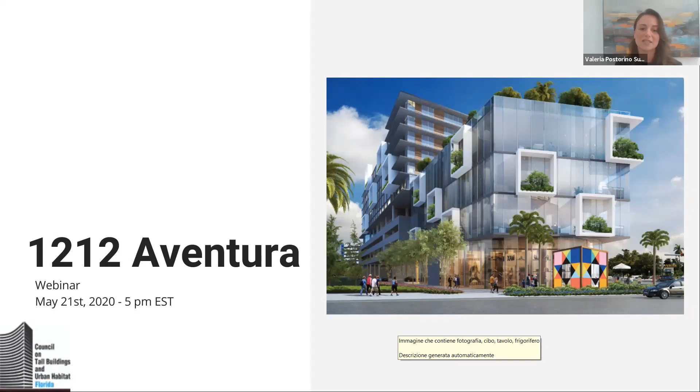Just a brief introduction about the Council on Tall Buildings and Urban Habitat. It was founded in 1969. It's a non-profit, multidisciplinary association focused on tall buildings and sustainable cities. As of this year, 2020, the CTBUH member network includes more than 2 million individuals working from more than 10,000 offices spread across the world. In our audience are developers, engineering, architectural firms, contractors, construction managers, project managers, materials and systems suppliers, associations, governmental associations, universities, and others.

Here's some of our members. The CTBUH has a global presence with 3 offices between Chicago, Shanghai, and Venice, Italy. We have 13 chapters, of which the Florida chapter is an active one. It is led by Christoph and Danilo, together with Dean, Marco, and Mindy. And this year we started the Future Leaders group, which I am chairing together with Santiago, Hari, Elizabeth, Sergio, and Jorge.

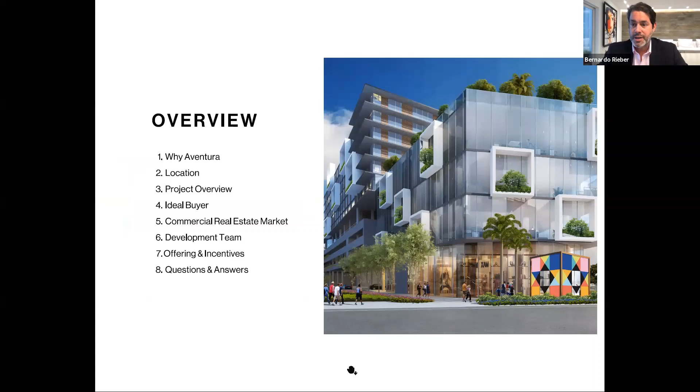I want to introduce myself as a civil engineer and general contractor, but I have shifted to the development side. I mention this because I understand there are a lot of colleagues in the audience, and my role here is to try to put together the best team of experts possible to develop these beautiful projects that will really leave a mark in the community.

Now the first question is, why Aventura? I presume that we have in the audience people from all over the world. For those that know South Florida, I need to mention that we're blessed. This city has great weather, a fantastic mix of cultures. Well, in the panel, everybody's from a different country, so that gives you an idea, and we all live here.

And Aventura in particular has a very affluent community. And within the city, we are located in an area called Aventura Health District. We are 1 block away from the major hospital. We are less than a mile away from a major mall, the Aventura Mall. It's visited by 28 million people a year. So that's incredible.

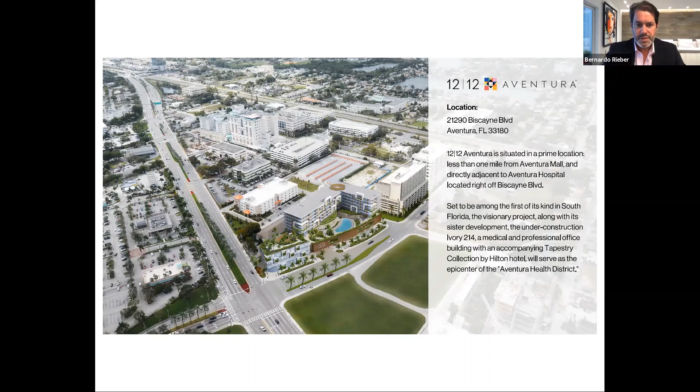As I said, me as the developer, have the role of putting together a great team, which will talk to you in a minute, in architectural, structural, sales, to make this happen.

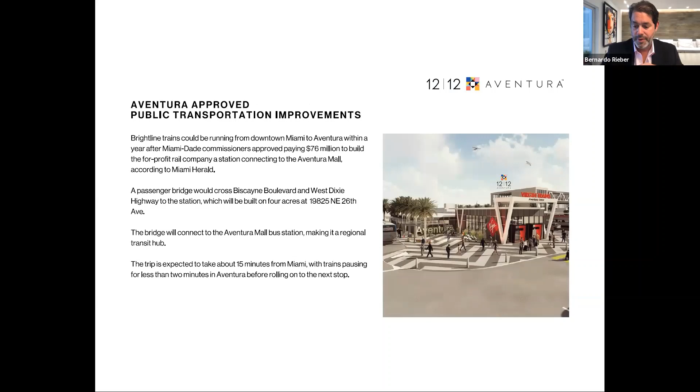The county just approved a train station, the Virgin Trains, very close to us. So this is a fantastic thing for the project and to minimize the vehicular transit.

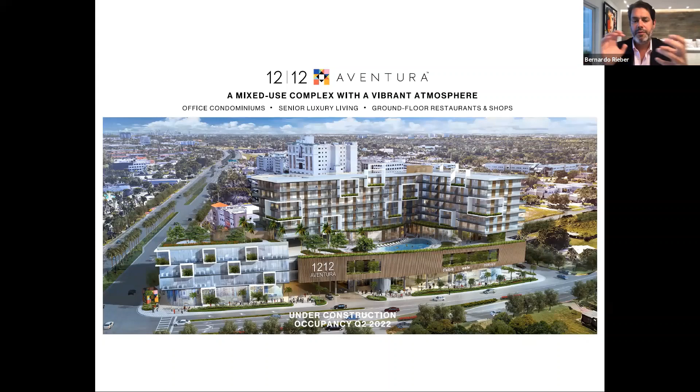Okay, here you have a closer look. We have 3 components. Basically, we have offices on the left side, the glass portion. We have a huge food hall, food, beverage, and entertainment in the entire ground floor. And above, you see residences, mostly for senior citizens, people 65 and over. So this is fantastic, and one of the challenges is how to make all this combined in one building, but with different entrances, so they live together, but they're extremely independent, one from the other.

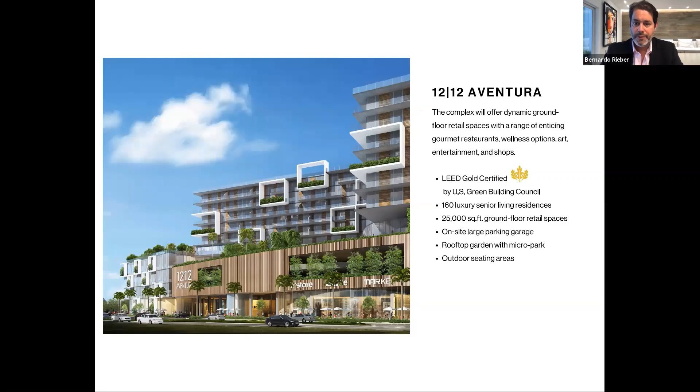We are Gold LEED certified. We have in total 160 residences, 25,000 square feet of food and beverage on the ground floor. We have a rooftop, and we have 25,000 square feet of offices in the front.

So I believe I'm going to let the experts now speak a little, describe the project. I'm going to let Arquitectonica exactly mention how they made this dream possible. Thank you very much.

That's great. Thank you, Bernardo. Thank you very much, Bernardo. And now Maxine and Fidel are going to show us what the architectural features consist of.

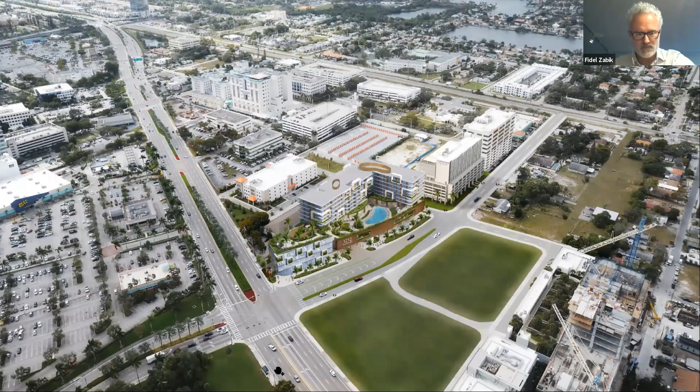Great, thank you. Thank you, Valeria. We wanted to thank CTBUH for the opportunity, and also thank the client for being so energetic and inspiring us all in a way that is surprising to me. I think it's been a real journey so far, and we're looking forward to where we're going from here.

I've been told to curtail my discussion. I'm very interested in South Florida and Aventura and the prospects that exist here, but our focus is more the architecture, and the time is tight. So I could probably talk for too long about the broader context.

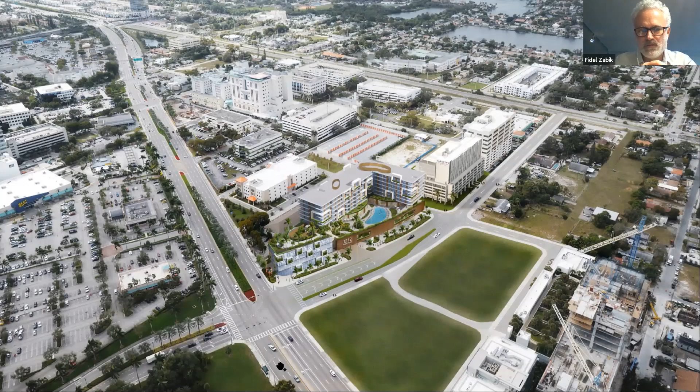But speaking about the project more specifically, the client came to us with this intent to create an assisted living, a senior facility, that has an assisted and an independent living component, but to do it in a way that is different from how it's typically done, and to make it a place that is interesting and invigorated and youthful, activated in a way that we usually don't find assisted living facilities to be. The other components, the office and retail component, add to that, right? So there are multiple elements that bring interest to the main anchor component of the ALF.

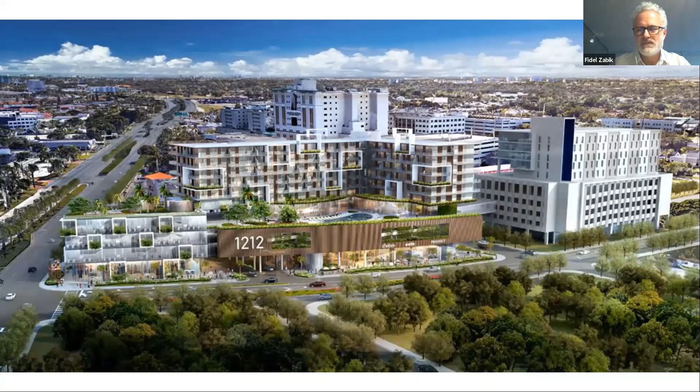One of the thoughts was that the design wants to be something unique and interesting and modern, and that is maybe a bit of a departure from what Aventura has traditionally been about. It's been more of a Mediterranean tiled roof kind of aesthetic, more traditional, and this represents, I think, a departure from that.

There was the intent to create a place for people to live and socialize within, and to create a place, in a sense, that also has connectivity to the surroundings.

We have a property directly to the west of us, known as Ivory 214, by the same developer. What we're hoping to do is create something of a new district here, and part of that is achieved by trying to harmonize the designs and create physical connectivity between the two projects.

And we do this by means of a bridge, a pedestrian and vehicular bridge connection, seen on the side of the building on 28th Court. The bridge helps us share parking between the two projects and greatly reduces the quantity of parking spaces. The reduction factor is 165 spaces.

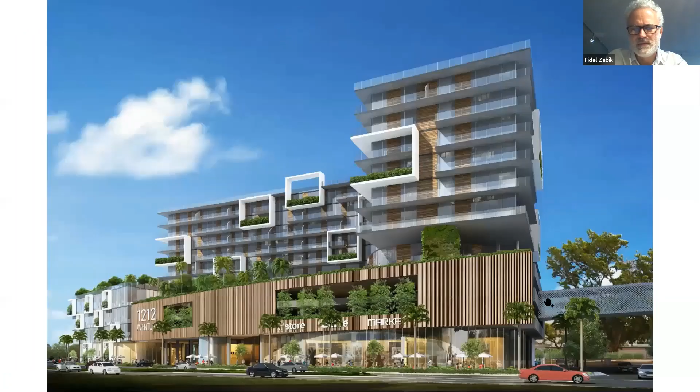What else can I tell you? We're pursuing LEED gold for the project, and that's related to the zoning approvals and the FAR of the site. We were able to achieve additional height and area as a result of compliance with LEED gold.

There was also quite a bit of work done with the city on the coordination of the new roadway to the north, which is the facade we can see here. The main facade of the project faces 214th Street, a new extension of roadway connecting the existing portion of Aventura east of Biscayne Boulevard through to greater Miami-Dade to the west, traveling along where it says 1212 Aventura and beyond.

So what can we tell you about design and materiality? We have the offices located on the busiest frontage, which is Biscayne Boulevard. This makes sense from a commercial standpoint in terms of visibility, but it's also creating interest and intrigue and something of a buffer for the residential and the balance of retail and amenity areas beyond.

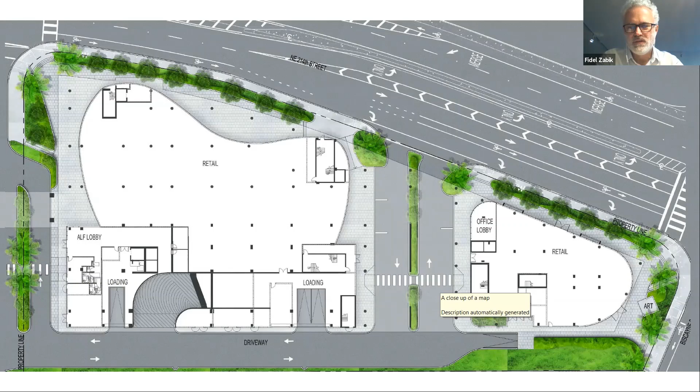We have 2 floors of garage on level 2 and 3, facing 214th Street, with direct walkable access from those garage floors to the office area. The bridge connecting our building to the adjacent building is also on the 3rd floor, allowing access for both pedestrians and vehicles.

The garage facade is a series of vertical fins, and the idea is that it's still an open garage in terms of ventilation, but the fins are meant to create a sense of enclosure. We've achieved that with aluminum fins in a panelized system attached to the concrete structure.

The idea was to create this element that floats in front and is separated somewhat from the balance of the building. We've done this via inclusion of recesses between the office component and the other end as well, not seen here. These vertical sticks create a facade that floats and is capped on top by the amenity deck for the ALF component.

Maxine, perhaps you could talk a little more from here.

Yes, so I will talk to you about the senior living facility. Starting from level 4 with the amenity deck to level 10 is about 172,000 square feet, representing approximately 78% of the developable area. We can count, as Bernardo Rieber mentioned before, 160 rooms in total.

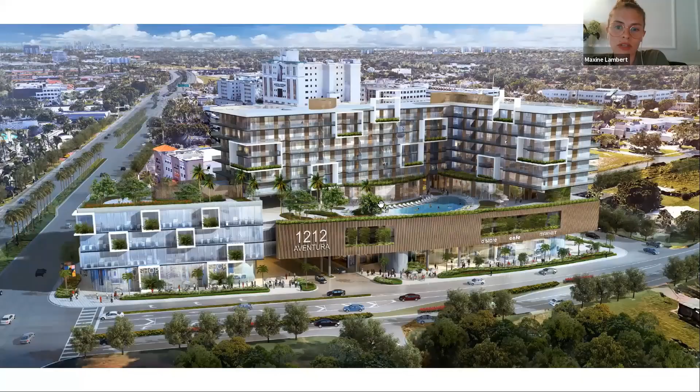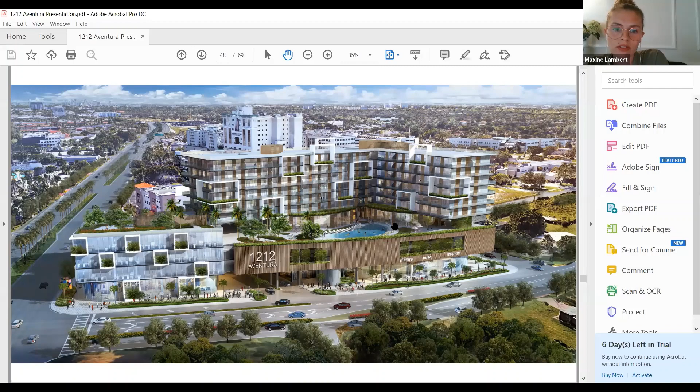The amount of glazing, so here on this rendering we can see better the amenity deck with the pool and also how the rooms are distributed. The amount of glazing and the generous ceiling height on the amenity level, about 15 feet clear, makes the space really bright, open, and a nice livable amenity area. The main idea of this amenity level was to create an active space and encourage residents to interact with each other. Let me try to show you a floor plan.

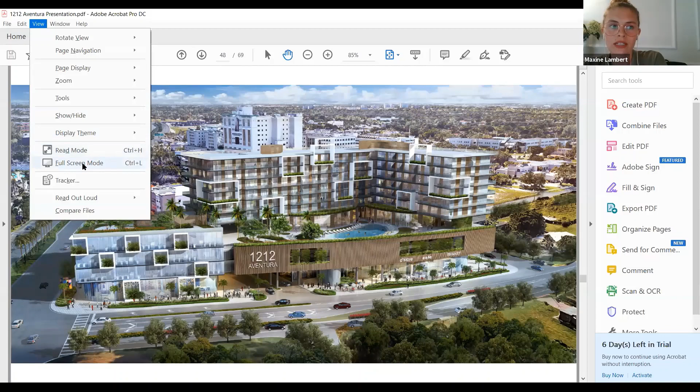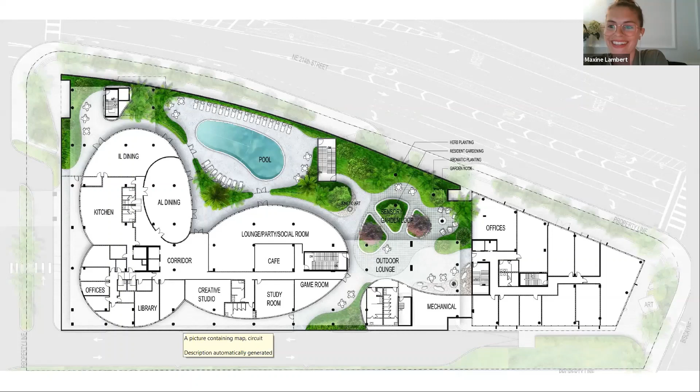Assisted living rooms will be located on level 5 and level 6, and from level 7 to level 10 we will have independent living rooms. What is really particular with this assisted living tower is the clear ceiling height of 9 feet 6 inches, which is pretty generous and more than typically provided for this type of use. Also, the units have really large windows and access to balconies. The idea was to provide a bright and generous unit space where residents feel good to live.

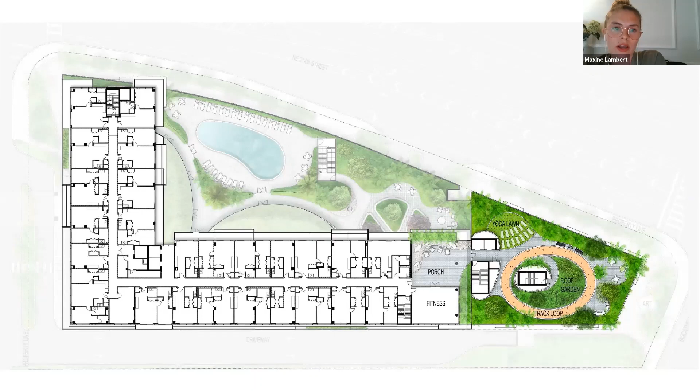This rooftop will have a lounge area, so I think it will be a really nice working space. You'll be able to enjoy the view and the Floridian weather. I think it would be pretty interesting.

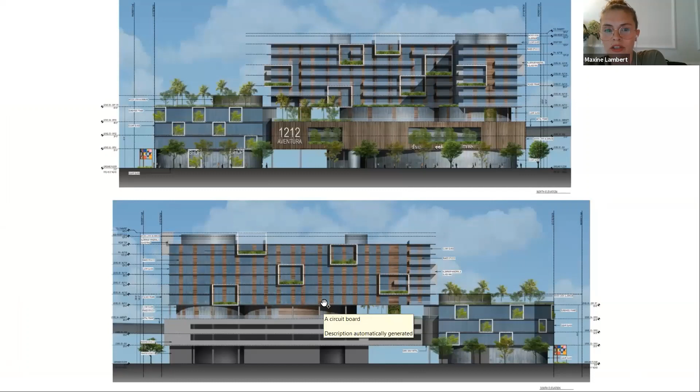What we can see here are the long elevations. There's a lot of glass, and there's also openness, with different elements used. On the upper image, you can see the office component to the left, at the extreme left, which is the most commercial exposure on Biscayne Boulevard. We have a lot of glass there, and framed masonry stucco-coated elements. Over the top of that is the accessible roof area, and moving further towards the west, the garage is clad in aluminum slats.

Below that is a very high ground floor glazed retail area. And above that, for the ALF component, again, the amenity area is tall, and it's also glazed enclosure predominantly. And then for the tower proper, we have a combination of window wall glazing, the white frame elements, balconies with clear glazing, and we are anticipating using a raked stucco finish on the upper component.

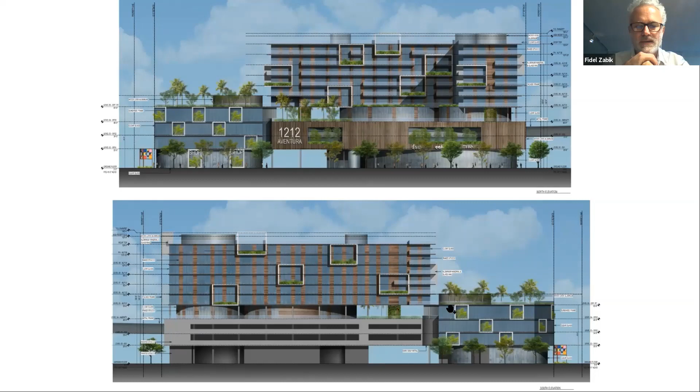So those are the main materials. We could maybe go to the next slide. That's really more of the same. These are the shorter elevations, and I think this and maybe the next are the concluding views that show the most prominent angle from Biscayne Boulevard with the branding imagery in the foreground.

And I think that concludes the architectural component, and we probably shouldn't take more time than we have already. But thank you.

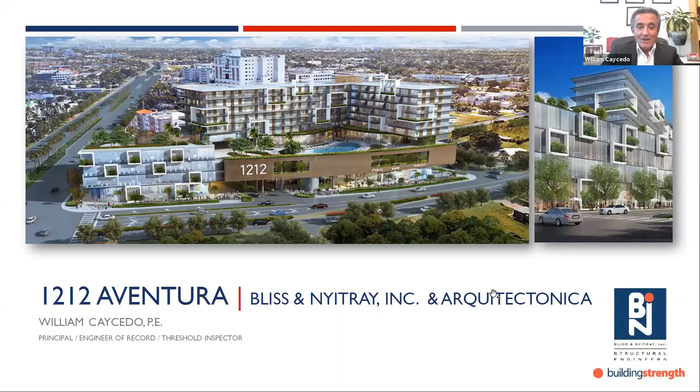Okay, next. The project, as you see, is a mixed-use building, and we have the office building basically on the tower, and the office building is a 5-story building, and the tower is an 11-story building where most of the mixed-use occupancies occur. The ground level is the retail, which is about 20 feet high, presenting some challenges for the structural design. From the 2nd to the 3rd level, we have parking.

On the 4th level is the amenities level, where a lot of things are going on. We have the pool, we have raised slabs, we have planted areas with areas where we're placing up to 3 feet of soil, and it's a very interesting place.

From the 5th level to the 10th is basically the tower, the residential tower, which has some of the challenges that we have there. So as you see, some of the balconies and the walls that protrude, creating those interesting portions of the building. Next.

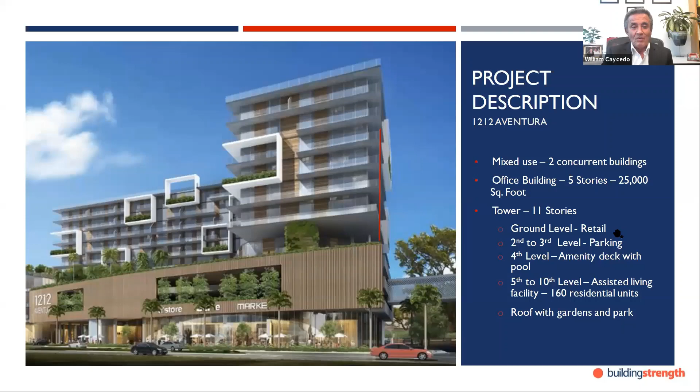Okay, the project was designed utilizing Revit. This building information modeling was essentially important for the preparation of documents. Revit models were continuously uploaded, particularly during the design and the later portion of the design, and created this close relationship between the architect and the engineer for the continuous changes that were going on. Next.

The building is basically a pile supported structure. The superstructure consists of cast-in-place concrete columns supporting basically flat plate post-tension slabs, and a slab on grade at the ground level. On the amenity level, the pool required that we step the slab down and created an interstitial space.

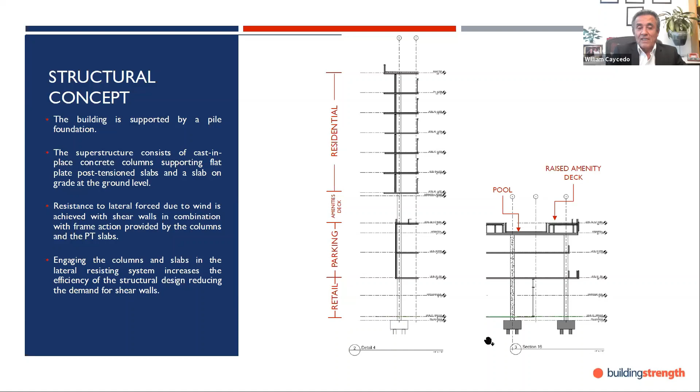One of the challenges for us in South Florida is the resistance to wind forces, and the resistance to lateral loads due to the wind was achieved with basically shear walls in combination with frame action provided by the columns and the PT slabs. Engaging the columns and the slabs in the lateral resistance system created a very efficient structural design, reducing the demand for shear walls.

The shear walls were somewhat limited. We always want to minimize the shear walls, and we need to control the deflections in the building. At the beginning of the design, we limited the deflections to what we call L over 600, which is basically the height of the building divided by 600.

ASCE 7 establishes a limit of L over 400, but we chose to start with L over 600 because of the possible changes that generally occur at the beginning, and we were required to prepare a foundation package that was being developed while we were doing design development. We anticipated multiple changes, because the building had not been thoroughly designed, including openings that are generally required in the shear walls, which tend to increase the deflection of the building as we proceed with the design.

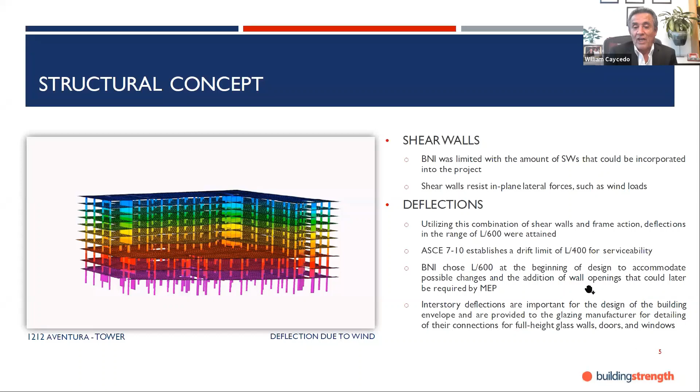Interstory deflections are very important because we have these very tall stories with glazing and masonry walls. The information regarding deflection is generally provided to the glazing manufacturer for the design of connections and the design of the exterior walls.

The building, as we see here, is separated by an expansion joint, which allowed for the separation of the two buildings. One was a taller tower, and the other one was a 5-story building. There's also parking on one side and offices on the other.

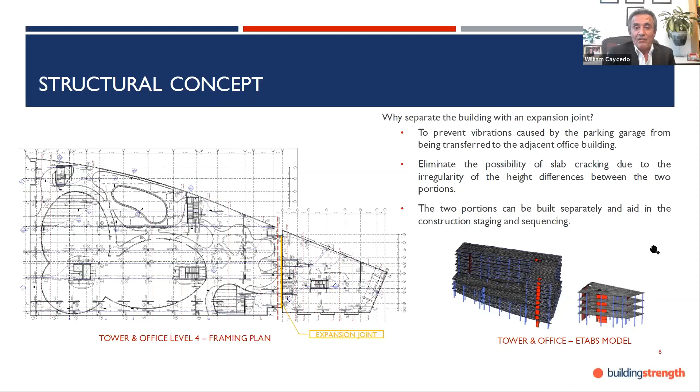The separation of the garage and the office building was important to minimize vibrations that may occur between the two buildings. The two portions can be built generally separate, creating staging and sequencing for construction.

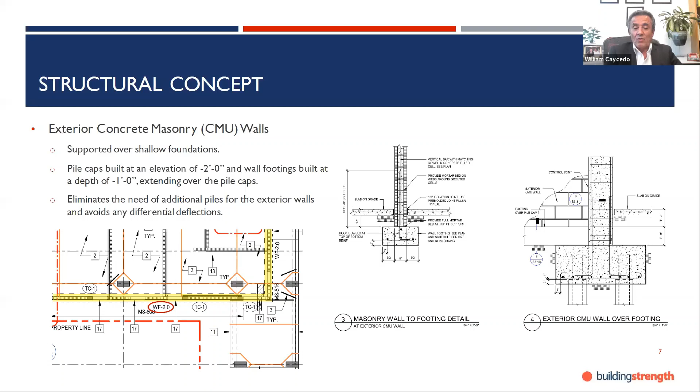Exterior masonry walls and the exterior envelope are supported by shallow foundations, even though the building itself is supported by piles. We provide a continuous footing supporting these exterior walls that are on grade, not supported by piles, and we generally ride them over the pile caps. The top of the pile cap is 2 feet below grade, and the footing is 1 foot below. This creates a support for the wall against the column so that we don't have differential deflection between the two structures, one supported by piles and the other by shallow foundations.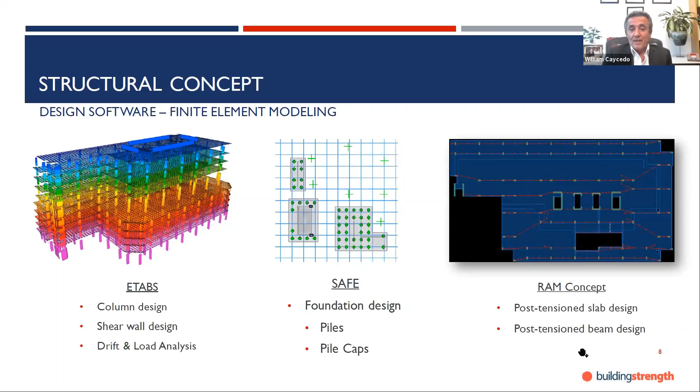Teamwork was very important in this project. We had to work with the owner to incorporate owner changes in design, which are common in a project like this, particularly in the early stages of design. We had to prioritize the owner's needs to find solutions to accommodate changes during design and also sometimes during construction, which sometimes occur when the design has already advanced significantly.

We also worked with the owner to provide preliminary packages for early pricing and permitting. It was very important for the owner to get the project started, and we were able to work with him to get early foundation packages so that permitting could begin while the building was still being designed.

Teamwork with the architect was also very important, having effective and constant communication between the engineer and the architect, and early communication with the landscape architect to determine amenity features, such as planter locations. Sometimes artificial plants were used at locations where it could possibly reduce the load demand on the building.

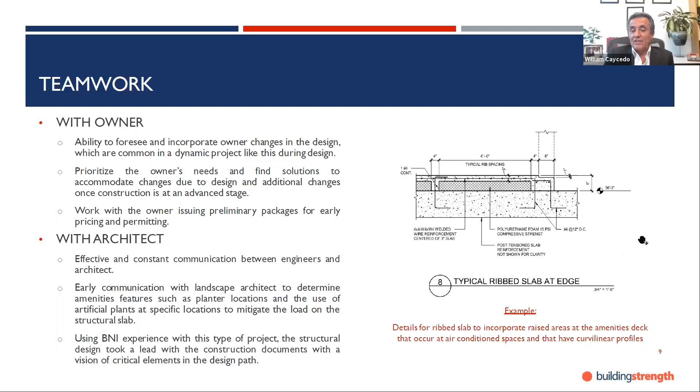Next. We had to create a foundation package to be issued for permitting while the project was still in design development. Using the early foundation package requires the design to be fairly complete from a structural point of view, and critical decisions are made which later on cannot be changed.

The overall process required a lot of coordination and teamwork with Arquitectonica. The early foundation package allowed construction to start with pile installation, which is generally a long lead item.

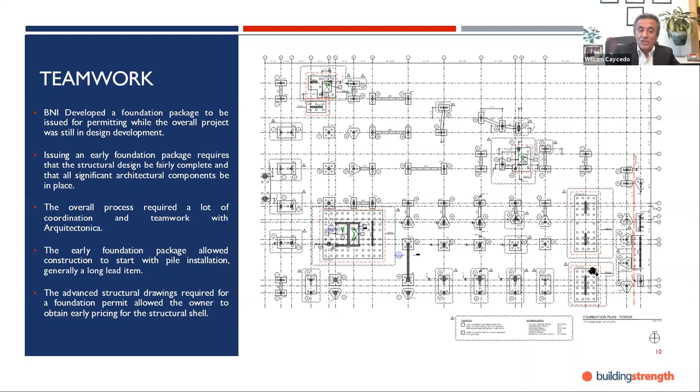The advanced structural drawings required for the foundation permit also allowed the owner to obtain early pricing for the structural shell. Column design in this type of building is generally something that requires a lot of effort.

We're going through different spaces, and for instance, it's a mixed-use building. The retail spaces on the ground level generally try to benefit from almost column-free spaces, while the parking levels usually have a rigid spacing requirement due to the parking stalls and the drive aisles.

On the amenities level, we go back to trying to keep as column-free as we can, and trying to minimize and stop shear walls so that they probably change in size at the amenities level, trying not to get these big walls through these open spaces. And in the residential building, the placement of columns usually needs to be within partitions and walls in order not to have them into usable spaces.

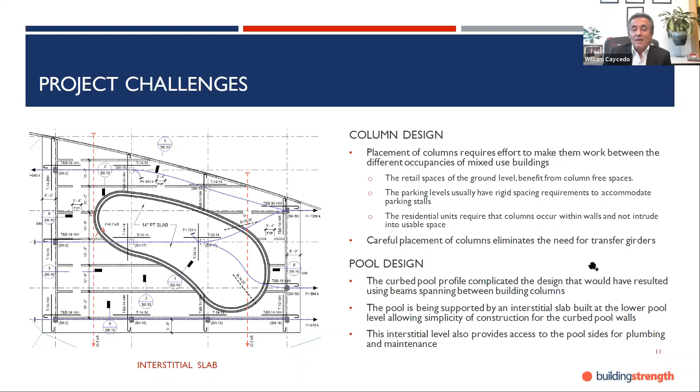The pool design was also a little bit of a challenge. For this project, the pool had this curvilinear shape, which made it challenging for us to frame the pool with beams that would go from column to column. So it was decided that we would provide a slab at the pool bottom level, which is more kind of square in shape, and that would allow the pool and the pool walls to be constructed later on in the shape that is needed, which is basically kind of curvilinear, in ways minimizing major forming efforts.

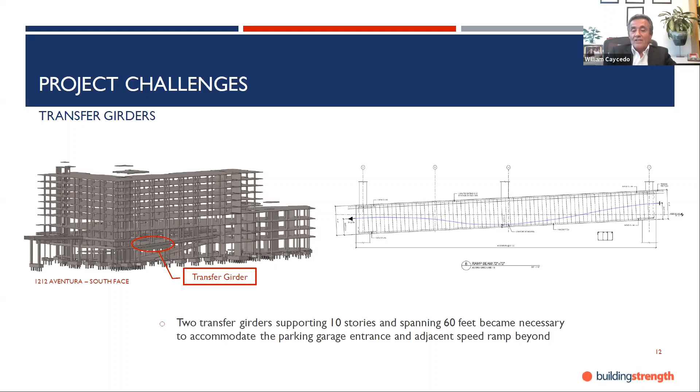We also had to deal with some transfer girders. The building has at the entrance, it was necessary that we provide support for columns, and yet we had to allow at the garage entrance. So we had some girders that were supporting 10 stories and spanning 60 feet. This occurred basically at the entrance, adjacent to the speed ramp beyond.

An interesting portion of this project was the vehicular pedestrian bridge that connects 1212 Aventura and Ivory 214. This pedestrian bridge basically spans over Northeast 22nd Court and connects the two buildings. Ivory 214, which is now in its completion, is the first phase of this expanding medical habitat. The structure was designed by Bliss and Nyitray in collaboration with IDEA Architect. The first phase includes hotel and offices.

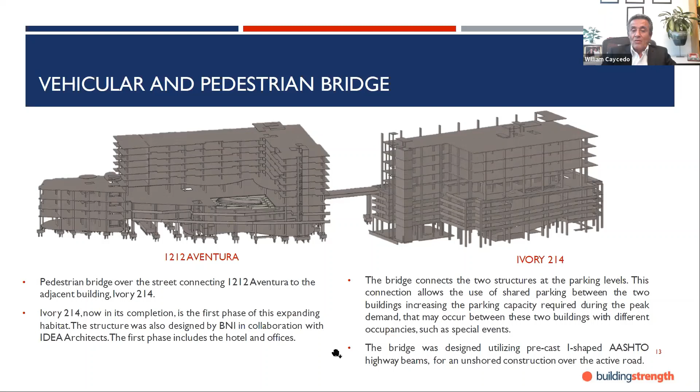Basically, this presents our information, and it details some of the challenges that were given to us, and we appreciate the time to talk to you. Thank you. Thank you very much, William.